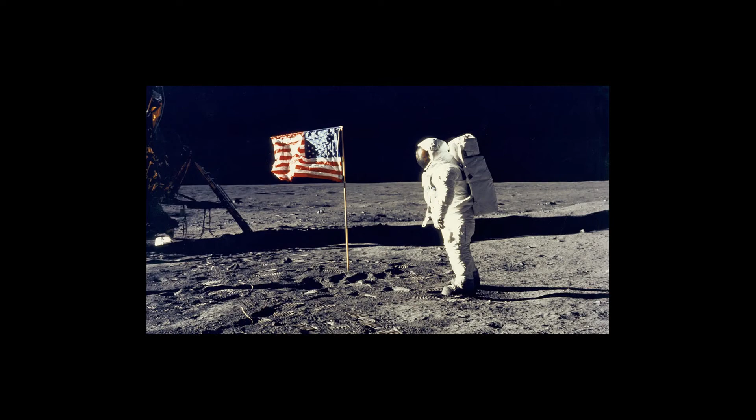After we reached our Earth boundaries, the space age started when nations began to compete beyond Earth, looking forward to dominating outer space, colonizing the Moon, Mars, and even beyond.

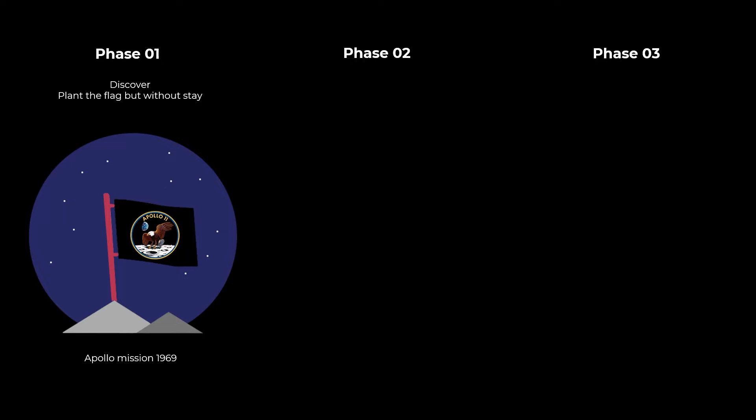But colonization comes in phases. First we go explore but without staying, like in the Apollo mission in 1969. Phase 2 is creating small settlements, but we are still dependent on our home country. In the final phase, we build colonies, control the resources and immigrate to the new land, and this could be the new phase to colonize Mars.

Our current challenge is the second phase, and this time the challenge is completely different. The Moon is not a welcoming place for living things, due to the lack of a lunar atmospheric envelope, and the long lunar days, as one day on the Moon is equal to nearly 29 days on Earth. These factors lead to a high difference in temperature on the Moon's surface between lunar day and night.

Micrometeorites rain frequently on the Moon. There is a high amount of exposure to space radiation and cosmic rays. There are also seismic events that happen frequently on the Moon. There is the need to find water for living and generating energy to stay for longer periods. On the Moon, there is a high amount of dust in the lunar environment. And there is microgravity, as the gravity on the Moon is 1/6 the gravity on Earth.

That's why it is important to consider a good shield for the habitat, the period of stay, avoiding joints, and an emergency plan. Also considering the landing location.

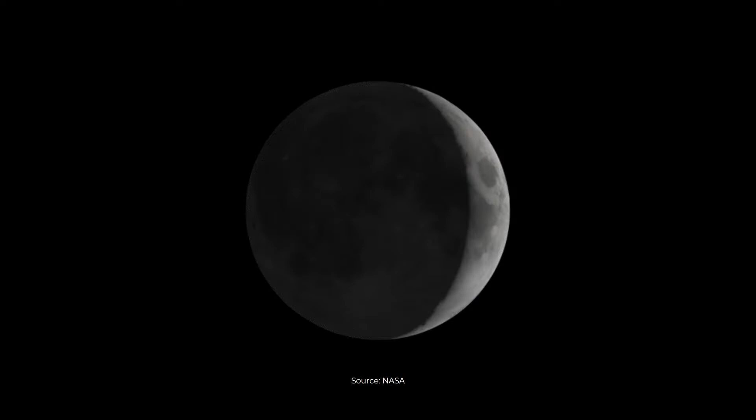On the surface of the lunar South Pole, the temperature average is 13 degrees Celsius below zero, and there are some craters where the temperature was detected to reach 250 degrees Celsius below zero, where sunlight strikes its surface at a low angle and never reaches its bottom. Water ice is stable at these temperatures, and there is strong evidence that some of these craters contain significant ice deposits.

Before coming to the habitat design, some strategies have been set. The first strategy is providing the maximum protection from radiation with minimum weight possible by using polyethylene sheets and fabrics in the interior, since materials with high hydrogen content can reduce the effect of radiation more than metals.

The second strategy is to provide the maximum possible function within minimum space and dimensions, also combining functions as much as possible to provide multifunctional spaces and take maximum advantage of them.

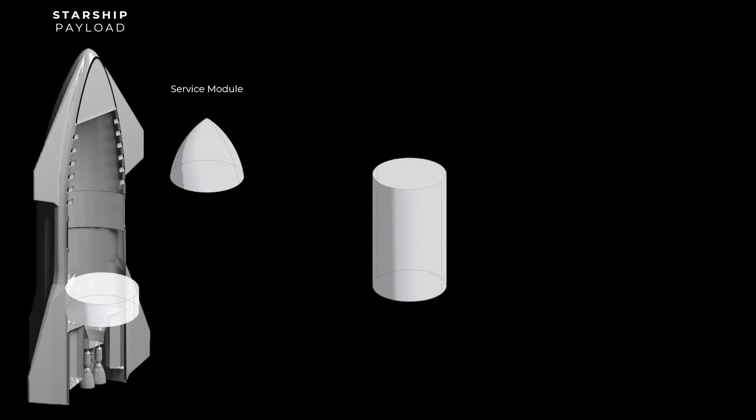These strategies are essential since the habitat will be transferred to the Moon within a limited volume in the payload of SpaceX Starship, which should occupy the service module, the habitat, and the lander. The service module will be used in case of emergency or after the mission ends, to bring astronauts back to Earth. The habitat is shaped to provide a habitat space of a diameter of 8 meters with a small atrium in the middle.

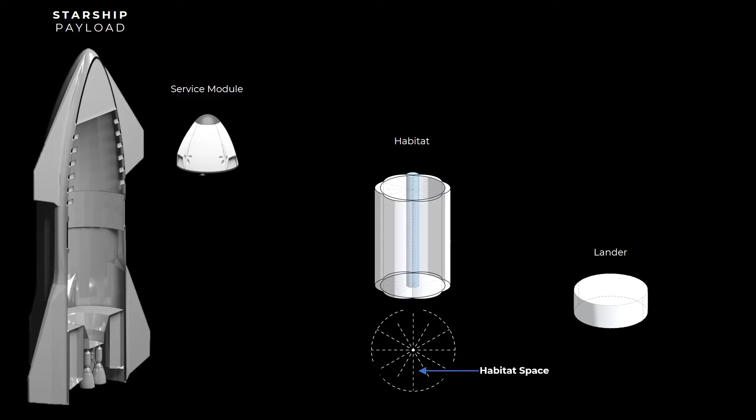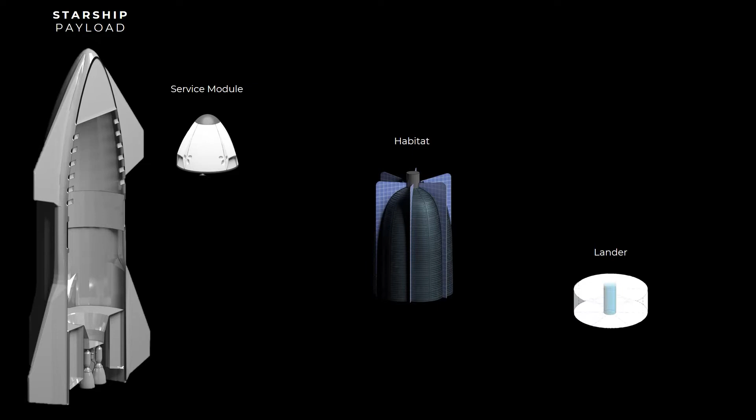The habitat is surrounded by a regolith shield with some subtractions from outside to add the solar panels. Finally, the landing module is used to land the habitat on the Moon after reaching lunar orbit. It's shaped to host 18 steering rockets, 3 fuel tanks, and the airlock, all surrounded by a regolith shield.

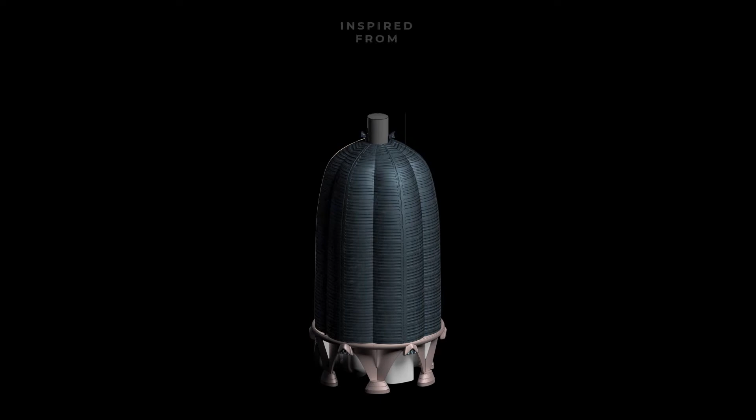These 3 components are designed to fit in the Starship payload to provide maximum space and function efficiency. Inspired by the combination between the pumpkin fruit's outer shell and the Mercury capsule spacecraft with its titanium skin, the form of the lunar habitat came to life.

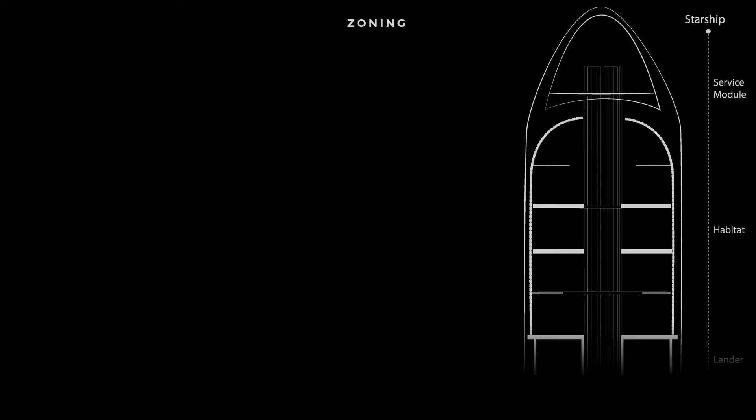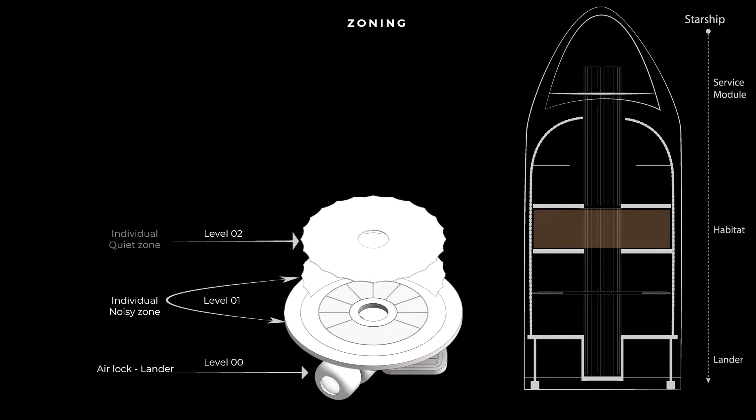When it comes to the habitat zoning, the ground level will occupy the airlocks, engines and tanks. The first level will be the individual noisy zone. The second level will be the individual quiet zone, then on the third comes the social noisy zone. And finally come the solar panels and the skylight.

Level 1 and 3 are double height levels which are divided into 2 sub-levels. The floor height is 3 meters in normal levels, and in double height levels it's 5 meters, divided into 2 sub-levels of 2.5 meters each. The floors are made of high tensile fabric structure to achieve minimum weight possible.

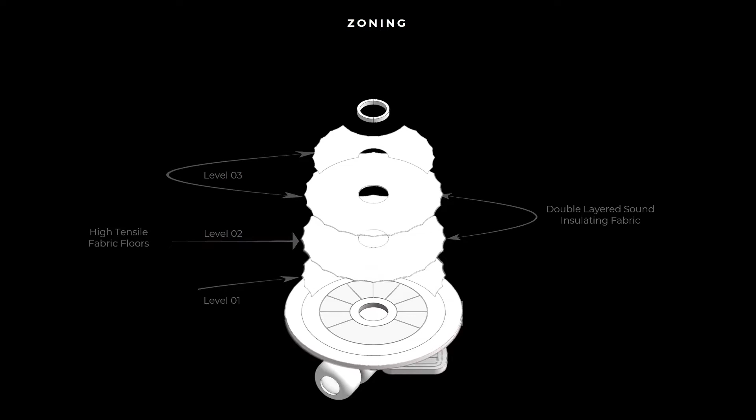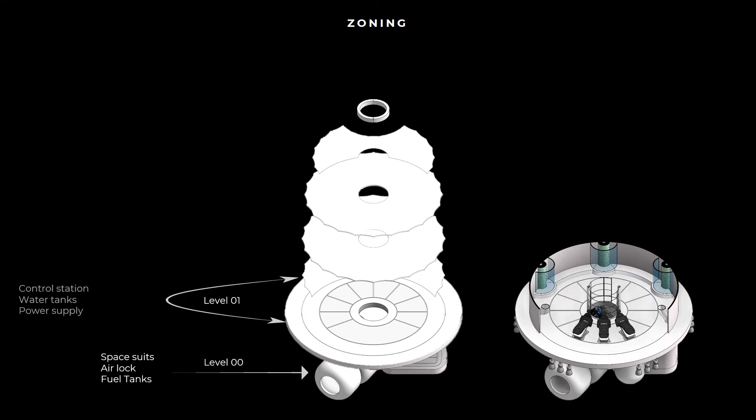On the ground plan, there is the airlock with its vestibule, and the astronauts' space suits. On the first level, the control station, power supply, and water tanks are on the lower level, and on the upper one, 3 labs, life support, and equipment storage. All the heavy equipment is distributed down to ensure a smooth landing with minimum tilting.

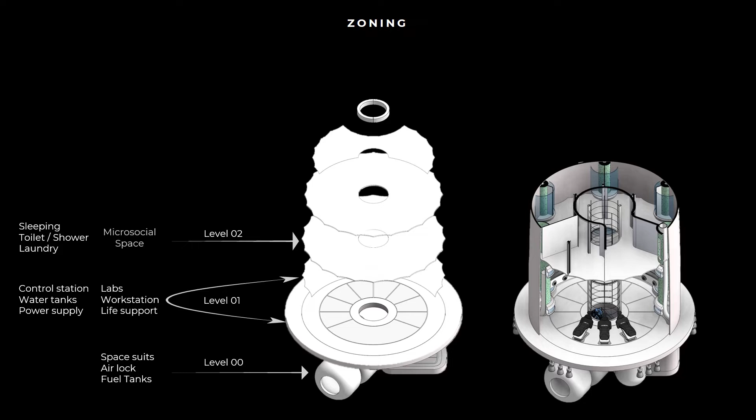On the second level, there are 4 sleeping quarters, toilet with shower, and laundry. The level is multifunctional, using fabric folding partitions so it could be used as a micro-social space as well.

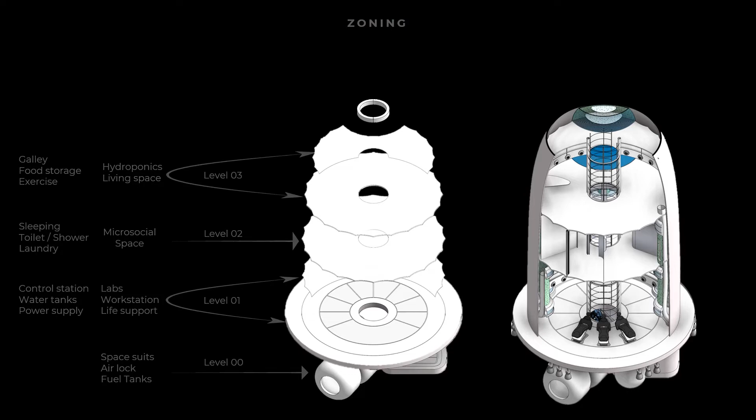On the final level, food storage, galley, the living space, recreation, and exercise are on the lower level, and hydroponics are on the higher one. The level is also flexible by combining many social functions together in one space.

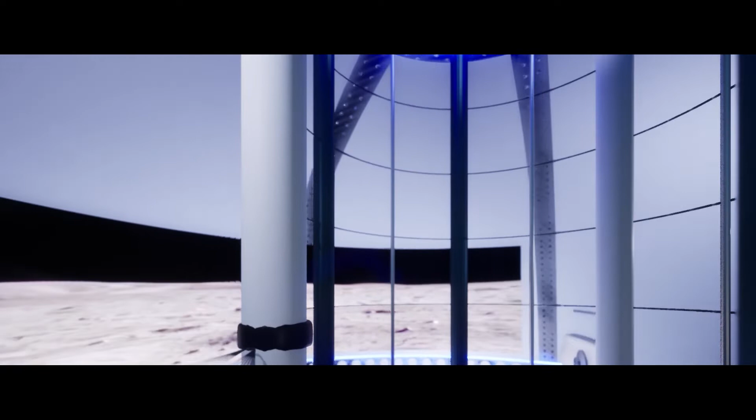All the furniture is simple, made out of rail and fabric, and could be inflated and evacuated to ensure lightweight design. There is a lightweight aerotrim out of fabric ropes for astronauts to exercise by trying to balance themselves inside. Panoramic displays and periscopes, similar to submarines, work through the skylight to allow astronauts to view outdoors without creating windows and being exposed to radiation.

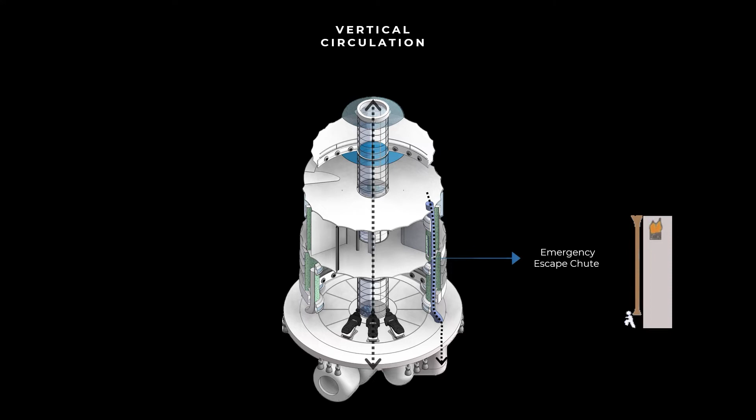The vertical circulation in the habitat is through 2 main axes: the escape chute, used in case of emergency, and the main central shaft made out of ropes and rail, since they are light and flexible for movement between levels.

The structural system is formed by hollow I-beams since they are light in weight, and the foundations will be provided with seismic springs to protect the habitat from quakes.

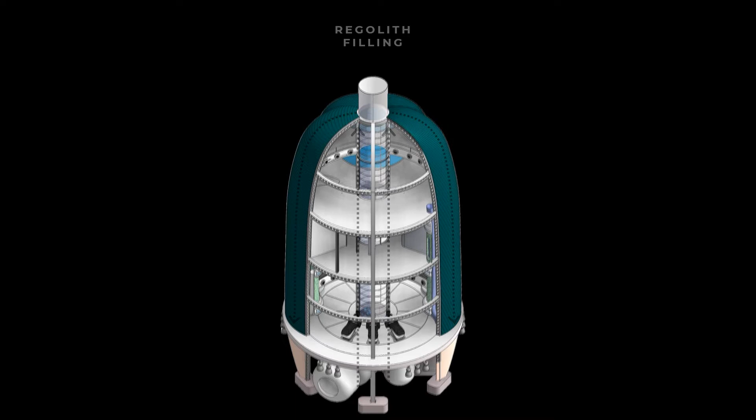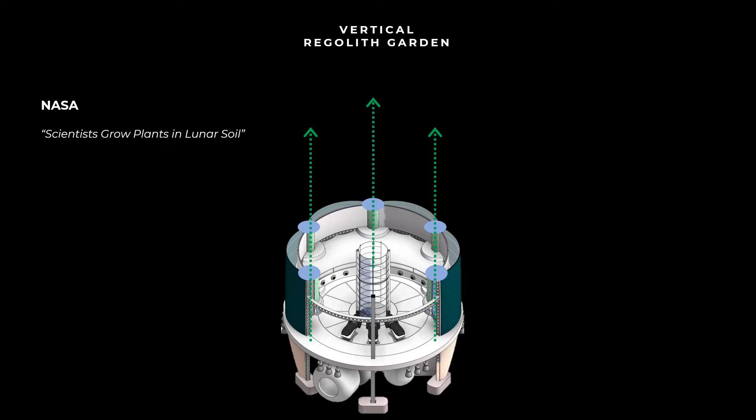Reversible cells have the ability to generate energy from hydrogen and oxygen, giving energy and water in an endless process. Water from tanks will be electrolyzed into oxygen and hydrogen by solar cells and transmitted to the reversible cells to give energy and water again.

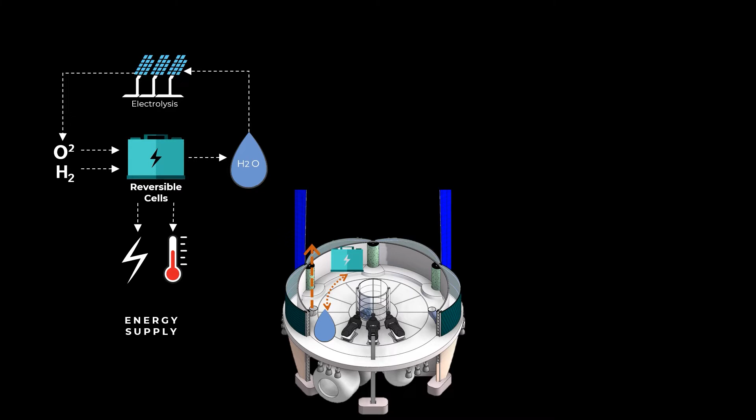The water will be transmitted to the life support system to be processed for oxygen supply. The urine from astronauts will be processed to be used in the shower, and the wastewater will be transmitted to life support to be reused again.

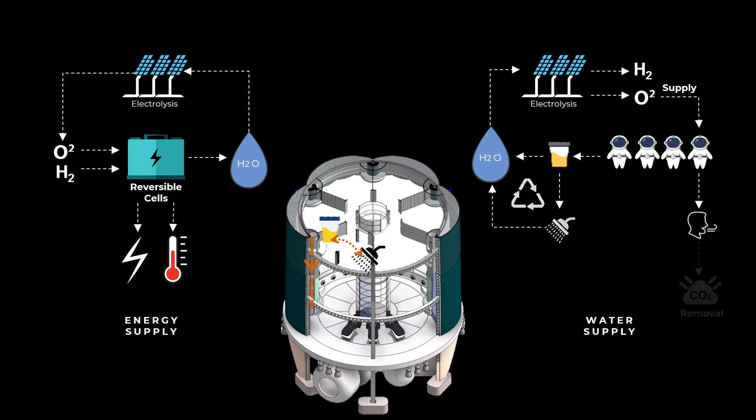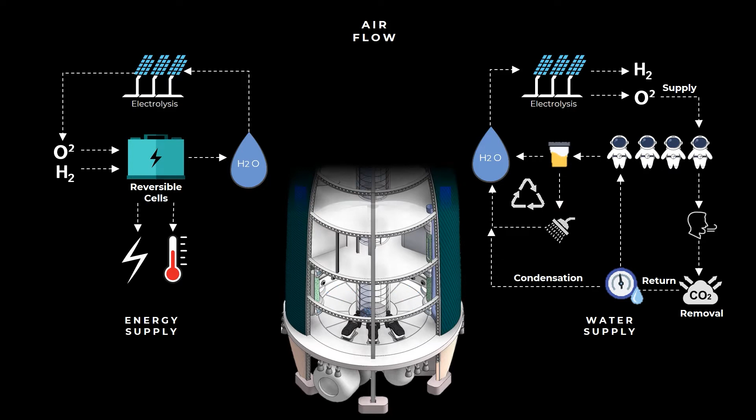The air produced by astronauts will be processed for CO2 removal, then passed to humidity control to return for breathing or condensation to be used again. The small gaps in the tensile fabric floors will allow smooth airflow for the supply and return of air. By combining all of that, we have what is called a life support system.

SpaceX Starship rocket is going to be our vehicle to the moon. The Starship will accommodate our habitat, the service module, and 4 astronauts.

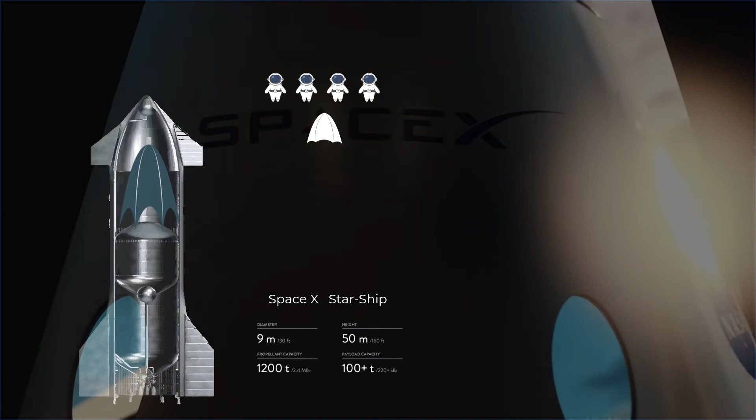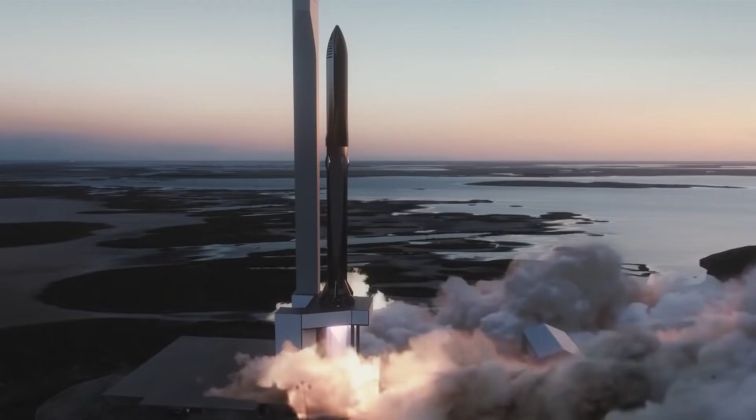The astronauts are supposed to stay in the service module till the rocket reaches lunar orbit and docks with the Lunar Gateway. At that moment, 1 astronaut will stay in the service module, while the rest move to the habitat to land separately. The journey starts when Starship launches from Kennedy Space Center in Florida, United States.

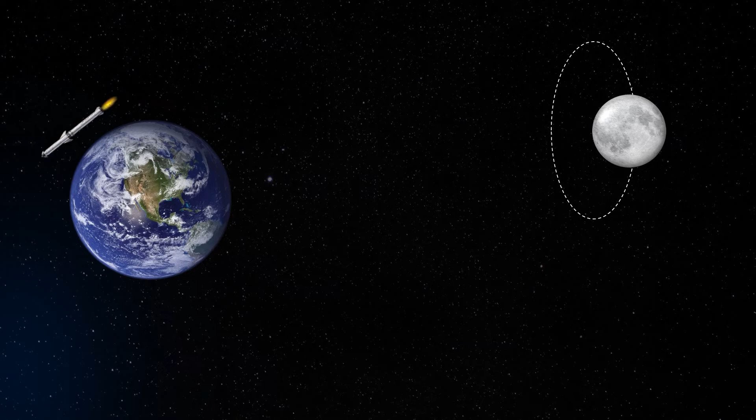The rocket reaches low Earth orbit and makes its cycle until it escapes Earth's orbit, and the spacecraft separates.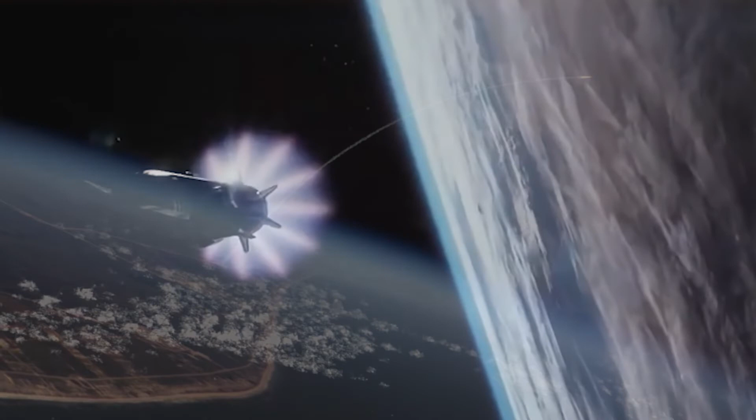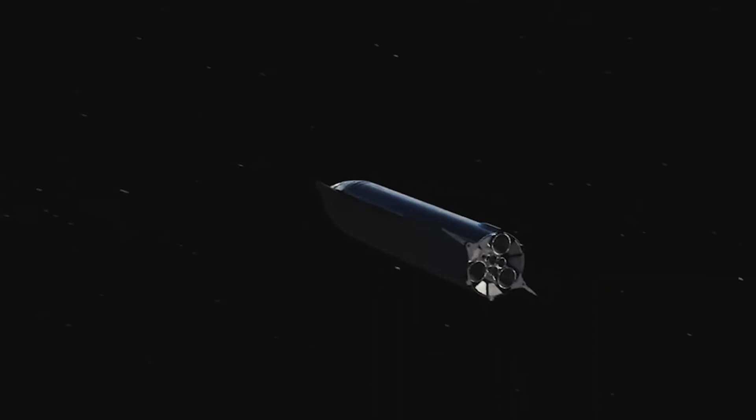The spacecraft takes its journey in space heading to the moon, until it reaches lunar orbit and starts maneuvering until it connects with the Lunar Gateway.

The Starship releases the habitat and emergency module separately.

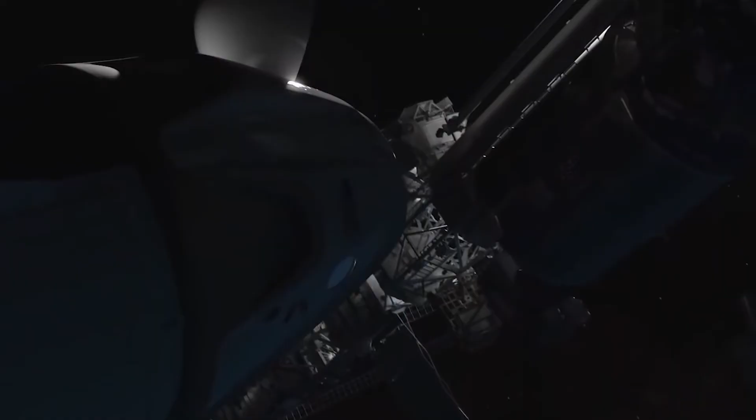After the mission ends, or in case of any emergency, the astronauts take the emergency module and escape from the moon until they reach the Gateway and connect with the Starship again, or they return back with the module to Earth.

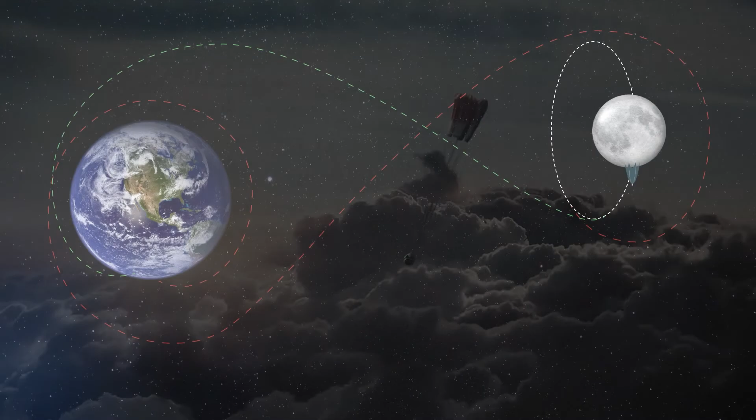When we are able to build small settlements and deeply explore the moon, we could move to the 3rd phase to build colonies and control moon resources. But moving to the 3rd phase means we need to stay for longer periods, and consequently will need more protection in a closed sustainable system between water, waste, and energy.

As Eskimos build their colonies in harsh circumstances using ice blocks to build igloos, with the same concept we could use the lunar regolith to make our blocks and build an extra outer protection for our colonies. For a closed sustainable system, we may be able to extract water from the ice deposits in the South Pole.

From the power coming from solar panels, we can generate energy and electrolyze water to form oxygen and hydrogen, to be used in reversible fuel cells to produce energy, heat, and water. The water produced could be used for food production, or it could be mixed with wastes and regolith to create regolith blocks to build colonies.

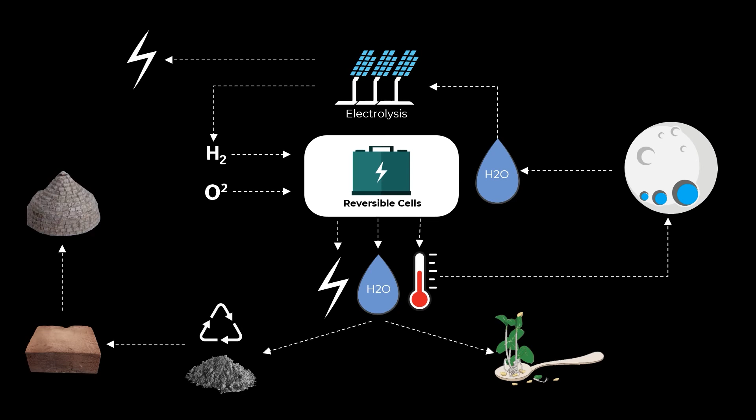And we may be able to use energy from the cells to extract water from the ice deposits again.